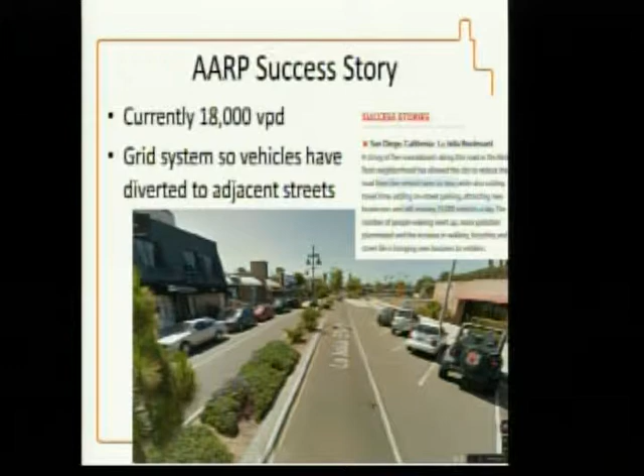Okay, Norway—this is something the mayor had brought to us, not at one of the council work sessions. She had scheduled an appointment with staff and came in with some graphics of the roundabouts in Norway. Some of them had removed maybe 150 feet from the intersection, with a signalized crosswalk, and some were a lot like ours.

So at her request we contacted those in Norway. It took a while to get them to respond, but I did get a response from one of their officials from the highway administration. Pedestrians have the right of way there—the reason I note that is because in Australia they don't, which was another thing we followed up on. That means cars must yield for pedestrians.

Typically they do not use signals for the ped crossings, but in a few instances they have, when they've had high volume roads and high speed. In that case they separate it because they don't want the signal too close to the roundabout. Normally they have their ped crossings 15 to 30 feet from the circulating area, and they find the safety is good with pedestrians there.

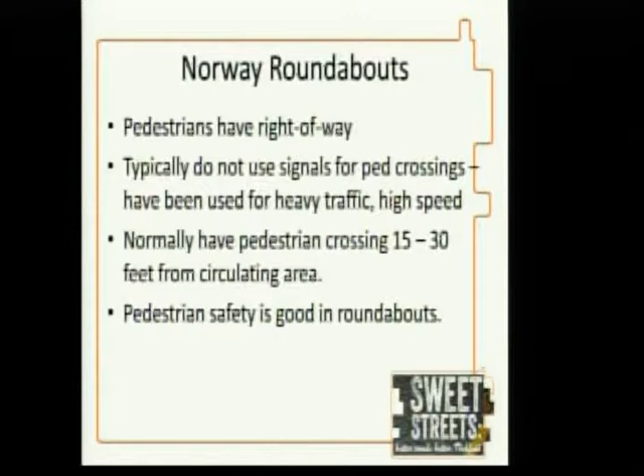Right now ours is about one car length, so probably around the 15-foot range. What we'd like to do on our new ones, and some of the recommendations coming out on new roundabout design, is to push it to like that 30-foot, two-car length. So ours are about 15 now, and we'd push it another car length? Yeah. So the simple rule is one car length now, we're going to go to two. That makes more sense, thanks.

Any more questions on Norway?

On Australia—she mentioned they had theirs set back, and the reason behind that is because pedestrians do not have the right-of-way at roundabouts there for some reason. They move them back to make them mid-block crossings so that they do have the right-of-way, just to establish that right-of-way for pedestrians. Which is interesting, because then—I don't know if we talked about Carmel.

Did we watch a video? Yeah. Okay, so we talked to them—we called them with some questions about how they do their ped crossings, where they're located, what problems they're seeing, what they've learned. They've got more than 60 roundabouts and started putting them in in the 90s. They do not have a yield for peds law at all, so pedestrians don't even have the right-of-way there, which was interesting.

But we talked to their staff, and their mayor was going to contact Mayor Goettel. I don't know if that connection happened—I was going to ask her today.

But they had this dog bone interchange. And apparently, they had signals there before, or was it unsignalized? That's what I didn't catch. It might have been a new interchange. They were grade separating - this is kind of an expressway, a highway where they're grade separating the interchanges. So this might have been a completely new interchange that went in as a roundabout first as opposed to a signal.

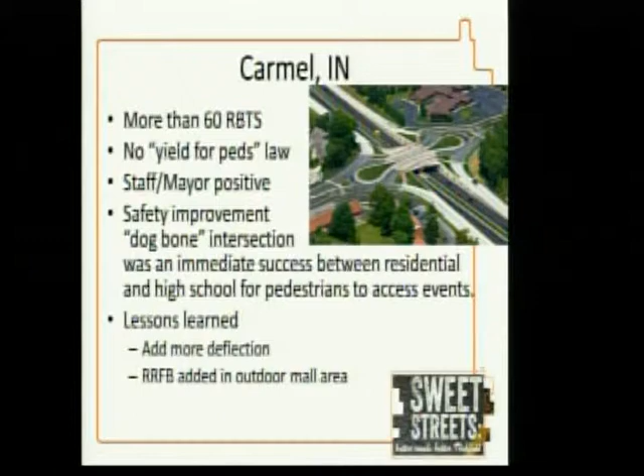Okay, any other questions? I'm going to write that down. So then now I'm just going to go over...

...comparing the signal to the roundabouts, because there's two options for these major intersections on the table for next Tuesday. The red here is a strip taking for the signal. And then here's the roundabout, you can see it clips the corner here. What we've done is we put the roundabouts in at the immediate area, and anything downstream was just tied into whatever it was at the signal. I don't know if we would need all that width, I'm not positive - that's a final design detail at that point. We didn't want to final design both alternatives. But you can see there are similar impacts to this property, which gets the biggest hit.

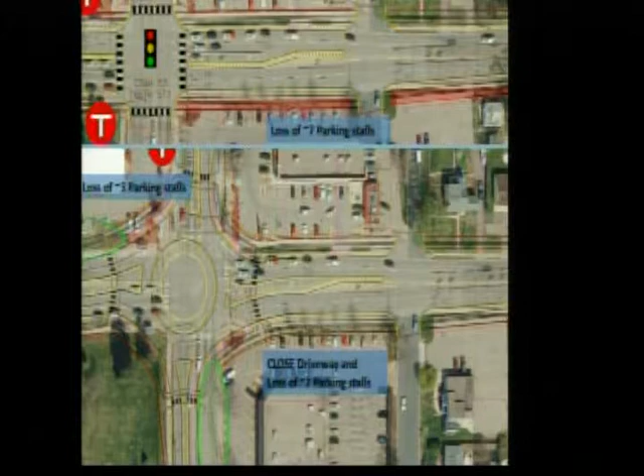We would do a one-way drive and angled parking. I thought I had that in one of these. The green is just showing additional space you could get with the roundabout that's normally taken by the road - we're also shifting it over here. I don't know where that one went with the diagonal parking, but this is just the level of service, and this is all stuff you guys have seen before, so just a review that the roundabout is showing a little bit better operation than the signal.

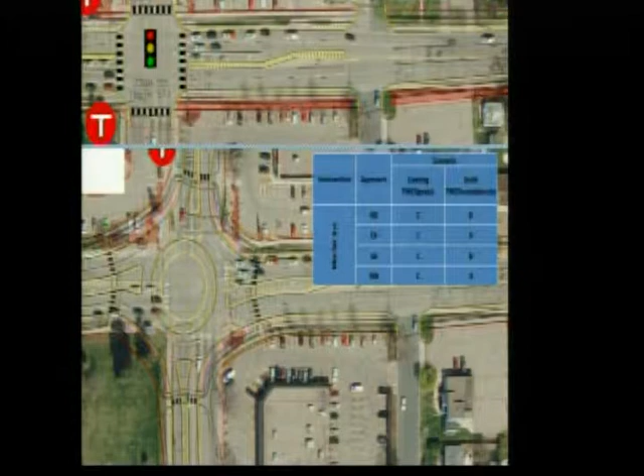Any questions on Nicollet at this point? I'll get to the property owners after we just go through this - I'm just reviewing the geometry right now.

Okay, Lyndale. Another taking here of a strip that gets a little bit into the Houlihan's patio. I think the red is the taking, right Maury? The pink shading. And then you can see the big hit here is on this corner. The curb line is right here, and now the new curb line's here, so you get this triangle. And then we configure that. The right-of-way doesn't change on the edges, you get a little bit more space down here. Essentially the same on either one here.

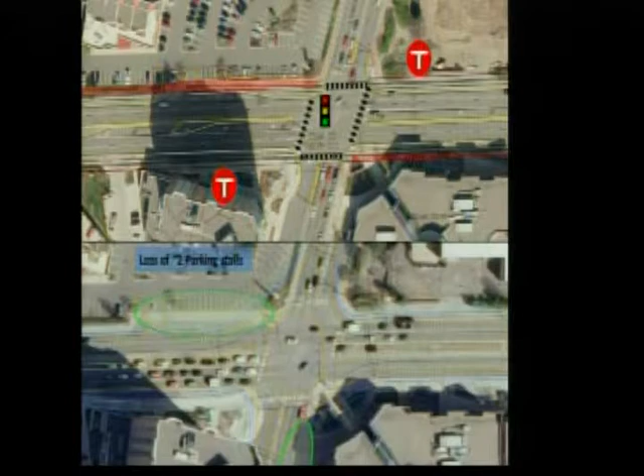You get it at the corner again, reconfigure the parking. So they're similar - we lose approximately two parking stalls on that one with the roundabout. And then the level of service again is similar. Roundabouts operate for cars a little better.

So just for clarification, you said Houlihan's outdoor patio is impacted by the signal? Yes, I'm not sure how much. Do they lose the whole patio? I don't think the whole patio. Oh, it's just that you could probably shake hands with the driver? Yeah, and again, there's a cycle track. Oh, okay. It moves over a little bit.

So I'm sure the curb - you can see where the existing curb is, about in the same place. Yeah, and I would just add that this was the preliminary layout where we held the 6-foot boulevards and put in a one-way cycle track and the entire wish list. So in design, if we're 2 feet into Houlihan's patio, we're going to make an adjustment to avoid that. The expense to get 2 feet - the county would definitely try to avoid that. So we'll want to minimize through the detailed design the impacts along the whole corridor, not just at that location.

So this would mean possibly losing the boulevard? Or something along those lines, just in this area. Heads up, we might want to look at our ordinances, because we used to have a restriction on bicycles in the Hub and Lyndale area, whether they could be on sidewalks and paths, so we might want to look at that. Now he brings it up. Yeah.

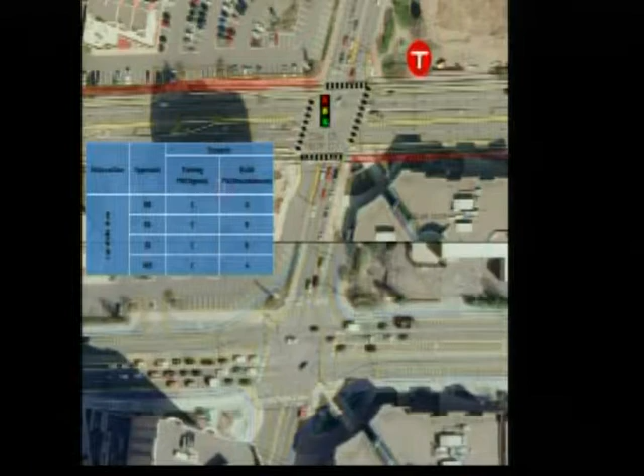I don't know, when they spoke with her, she seemed a little bit - it was hard to read whether or not she was wishing she had been taken back in the day. But even if she wanted to go, I don't know what we would do there. I mean, if we wanted to save that lot, it looks like we maybe could.

If you guys are willing to do that, the main point is that if the homeowner wanted to reconfigure the lot and the garage, that possibility exists without having to do a full take. She gets a new garage, huh? She's paid for it possibly - we may have alleys, I'm not sure, that dead end. Do we have to come out on that side?

Under the signal condition out there today, there's a sign that we get complaints it's hard to see, but the only locations we can put them is the no-turn-on-red for the ramps. I think the most confusing thing is that at certain times of day, 6 to 10, the intent is to provide a break so that if there's a gap in traffic on 66, there's nobody turning to fill that gap.

One concern we heard, besides access, was the number of gaps that would be there, because everyone knows the roundabout creates fewer gaps. Our modeling of this dog bone configuration went out past Emerson so we could see how many gaps there would be. The biggest thing is because you're only making a right turn, you don't need that full gap to get across the whole roadway.

So there are enough gaps to make that right turn fairly easily, in the grand scheme of things. My only concern is then they have to do a full U-turn at the next light, which is Ray Drive. I don't know how else you'd fix that, because a lot of people have a hard time doing a U-turn from a single lane and getting into the left lane. This shows the U-turn — and this isn't even at the stoplight, which is even worse, coming off a curve too. That's not a good traffic maneuver.

That's something I've heard when I talk to folks, one of the common questions. If safety is the issue here, the concern is making that U-turn where there's a curve in the road, and the sight lines for Linwood coming out there, that curve comes into play. When you're making the U-turn there, the sight line is not obstructed at all. So between having a left turn to do the maneuver plus the sight lines, we feel that wouldn't be a concern. But certainly when you're coming out of Linwood, that's where the curve comes into play.

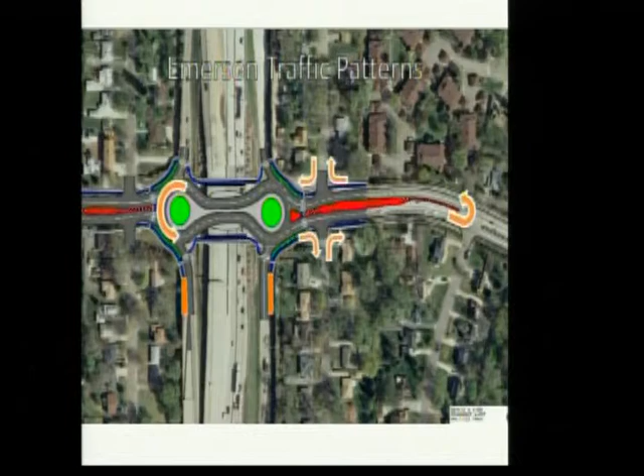Anything else? I'm going to back up. Okay, so anything else on the ramps at this point?

So then on December 3rd, the Transportation Commission made a recommendation to go with roundabouts at the intersections we're talking about here, including moving the ped crossings a little bit further away and including rectangular rapid flashing beacons at all the legs, then maintaining the signals at the more minor signal locations along the corridor.

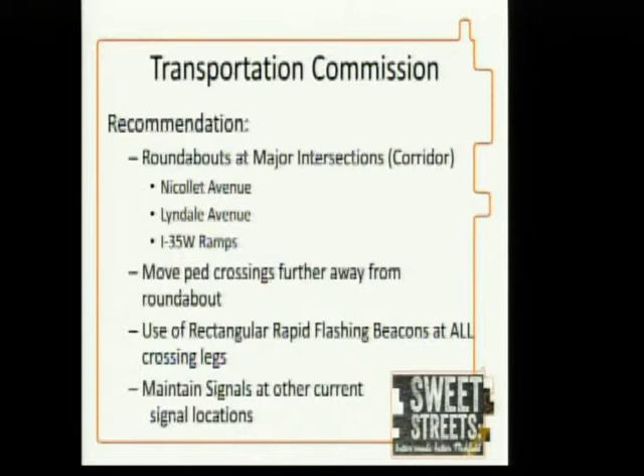So after that, when we had a study session, there was a list attached to your memo of everything that all the groups we've talked to, Jeff and Mike mostly. Property owners I'm going to go through first, then the community groups, public agencies, and the commissions.

So property owner meetings - this is orange because that meeting's not happening until next Tuesday. I don't know if you want to talk to us since you're here.

Okay, might as well. So we met with the property owners at 66th and Nicollet, and as Kristen mentioned, the hub shopping area - those are out-of-state owners. We actually finally connected with their leasing agent, who we're meeting with next week. But the other quadrants there we've met with - the ones on the east, north and south on the east side, are both the same owner and same leasing company.

In general, there were three gentlemen that we met with, and two of them were like, here's our concerns, but either way we can live with it, and we see advantages either way. The third one just didn't like roundabouts, so he joked about it himself - 'I'm old-fashioned, I don't like the roundabouts.'

But obviously their main concerns - on the north side, they really had no concerns, and actually saw some improved access potentially because of the right-in, right-out situation by the Dairy Queen/Subway part of it. On the south side, obviously, their biggest concerns were property impacts that affected their parking and their access that's right now right next to the intersection.

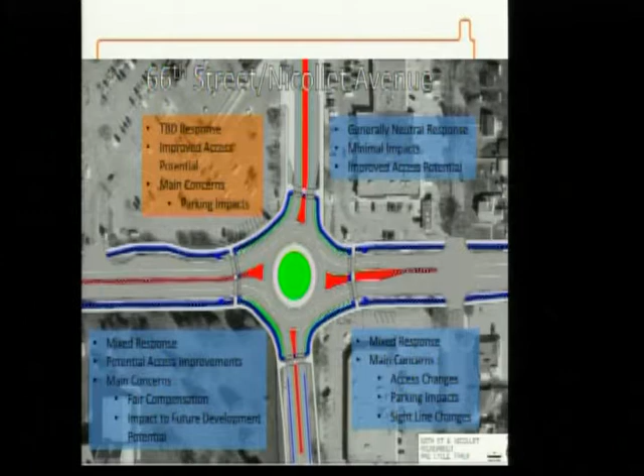Mm-hmm. Anything else? Not here. All right, am I going backwards?

Lyndale, we did get a meeting set up with all four quadrants. I'll start at City Bella since that's not commercial, well, I guess there is commercial there, but the meeting was with the property owners cooperative. We gave a presentation, and in general there were quite a few concerns going in, but after they saw the layout and how it worked, the strong reaction was to those push-button RRFBs and how that would work.

I heard all positive comments after the presentation, but again a strong desire to make sure those push buttons are on all four quadrants, which the Transportation Commission confirmed at the December meeting. They actually restated that in a letter we received that you don't know about today, supporting roundabouts. Patrick, you'll get one if you haven't already.

Other than that, obviously that quadrant and the kitty-corner one across the way are pretty minimally impacted in terms of right-of-way. There's no impact to the City Bella property. So it was really just about how, as an older community, they can make sure they can get across that area just fine. They also stated concern that at a signal, people will turn into their back parking trying to avoid the signal, so they see an advantage if it operates better than the signal traffic-wise, which would limit that.

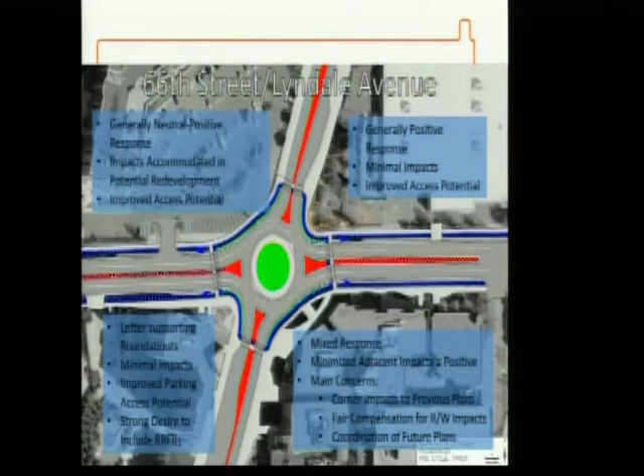So that's all four quadrants there. Anything else? Oh, and again, similar to Nicollet, we did a rendering to show those properties and how that would really transform that whole intersection from what's out there today. It's pretty concrete and pavement centralized, and it would really change the face. We just did some sketching of what it would look like if there were storefronts up on the corner. And then you also see the RRFB, those push-button lights, that would be part of the crosswalk.

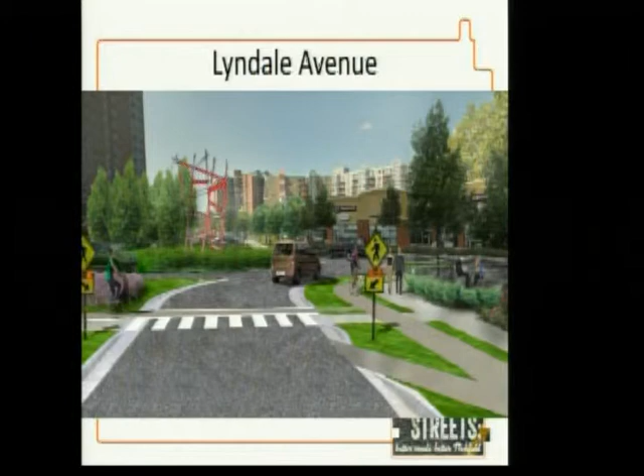Finally, 66th Street, as we mentioned, the biggest concern on Emerson was the access changes. The landowner on the north side was again generally neutral, and it was hard to gauge an exact response. The first reaction had things good and bad about it, but as we mentioned, there's potential to minimize that impact and also improve that alley alignment from the 90-degree bend that's there today.

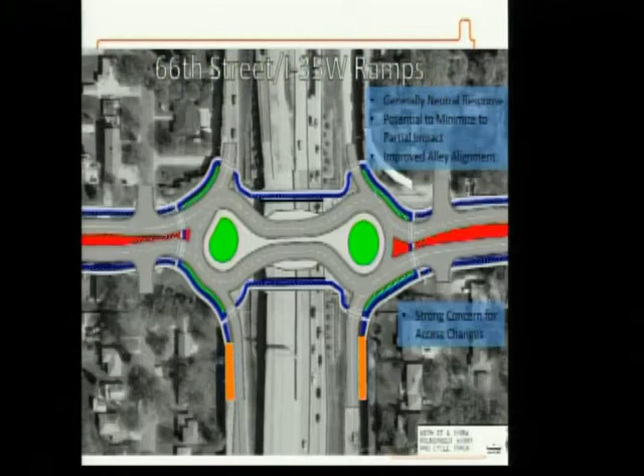This is just the traffic patterns we talked about. And then MnDOT, regarding the 35W ramps, they sound good with the roundabout, and they're good with full access at Emerson if it's a signal.

One of the questions we got from the public, especially brought up at the Community Services Commission meeting, was about the number of pedestrian crossings. Everyone sees Nicollet and the number of people that cross there, and it's also the highest boarding area for Metro Transit in Richfield. So there was concern about whether that high number of pedestrians would hinder the traffic operations of the roundabout. Jack had found a video of a situation in Canada, a 3-lane roundabout next to a high school.

High school, so there's a high number of pedestrian crossings, and we'll send out the link for that video. The main thing is pedestrians affect traffic operations, and in this case they have live crossing guards, so a person standing there kind of stops traffic. It's very similar to pushing a button to signal your intent to cross. The only difference is somebody saying, hey, there's somebody going to cross. The compliance was really good in terms of traffic yielding.

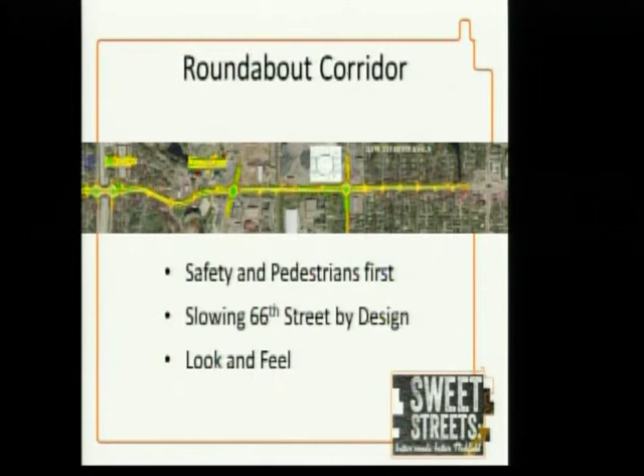That's pretty much it for the presentation. This ad will be in Thursday's paper, the Sun Current, to let people know that the decision is occurring. But other than that, if there are any questions or comments or anything else you want us to follow up on?

Just one last question I'll ask—does a different decision cause a delay in the project at all? I mean, if we decide on lights or on roundabouts, is there a time delay in the project?

No, as long as the decision is made—whether it's signals or roundabouts, the county's prepared to go either way. It's just delaying the decision that would be an issue, not deciding at all. It doesn't necessarily have to be all one or the other, you can mix and match. The staff report being prepared includes three different separate resolutions.